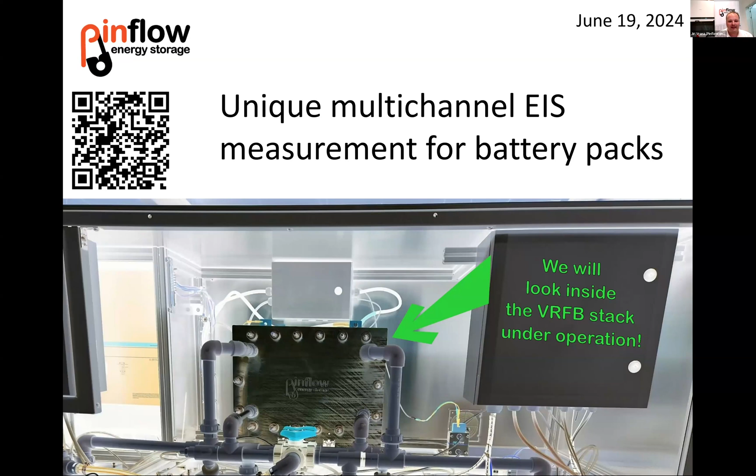So welcome everybody to Pinflow. We will be talking about redox flow batteries. Our company was founded as an academic spin-off from two Czech universities, where we were developing the systems completely from scratch. Redox flow batteries are focused on stationary energy storage. I will later describe the technology in detail. We started from very small systems. We went through all the stages of the laboratory scale-up process of stationary technologies. So we started at lab scale, then we were working with semi-industrial scale.

We come from the University of Chemistry and Technology in Prague, but the scale-up process was mainly conducted at the New Technologies Research Center under the University of West Bohemia, where we developed a 2 kilowatt redox flow battery stack, and later we spun off Pinflow, where we gained the license for the utilization of the academic know-how that we gained as researchers. Now we are in a nice manufacturing hall, and we are delivering our products for researchers from laboratory scale through semi-industrial scale up to industrial containerized demonstrator solutions of redox flow batteries.

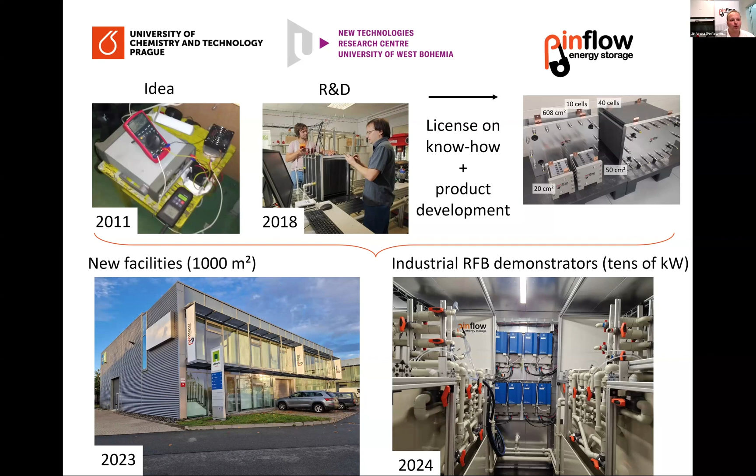But what is a redox flow battery? Well, actually, it is a flow electrochemical technology for energy storage. It is tailored for stationary application. We are pumping liquid electrolytes into the redox flow battery stack, where electrochemical reactions occur. We are always pumping positive and negative electrolyte, and inside the battery stack we have inert electrodes, and on their surfaces the electrochemical reactions occur. So we have positive half cells and negative half cells that have inert electrodes, typically carbon, and then we have some active species in the positive and negative electrolyte that are reacting on the surface.

The half cells are separated by an ion exchange membrane, and that is between the half cells and between bipolar plates that assure electrical contact between the positive and negative electrode. So the system geometry of the battery stack is actually very close to fuel cells, but the difference is that we are working with liquid reactants.

There are many flow battery technologies with different chemistries, but one of the most common is probably the vanadium redox flow battery. We will be working today with the vanadium redox flow battery, which comprises vanadium(III) and vanadium(II) in the negative electrolyte as electrochemically active species, and vanadium(IV) and vanadium(V) in the positive electrolyte. The solution is in an acidic environment in the presence of sulfuric acid.

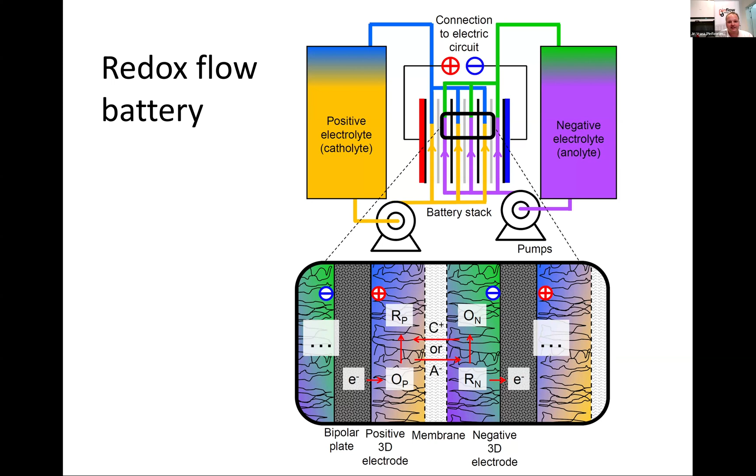But why deal with flow batteries? What is the business motivation? Where is the market for this technology? Well, this technology actually separates the power from the capacity. So it is a very modular energy storage solution where you can truly tailor the parameters of your stationary energy storage.

Typically, we are targeting solutions where we can utilize the high capacity load. The capacity is given by the volume of electrolytes, and flow batteries target longer duration energy storage. So from the perspective of market reality, we are somewhere between lithium stationary storage and fuel cells. Our batteries are designed for, let's say, 5 hours to 20 hours of operation.

The advantage of flow batteries is that the electrochemical reactions occur in liquid only on the surface of the electrodes, but all the active components are actually in a very nice environment given their chemical nature. It means that the lifetime of the battery is also amazing. The electrolytes in vanadium redox flow batteries do not degrade over time.

It means that when the battery lifetime is over, typically caused by mechanisms like erosion, like when a river is cutting into the earth, which is the mechanism damaging our electrodes over long-term decay, at the end of the system's lifetime you just pump out the vanadium electrolyte, and you can practically immediately, without any major treatment, use it in a new battery.

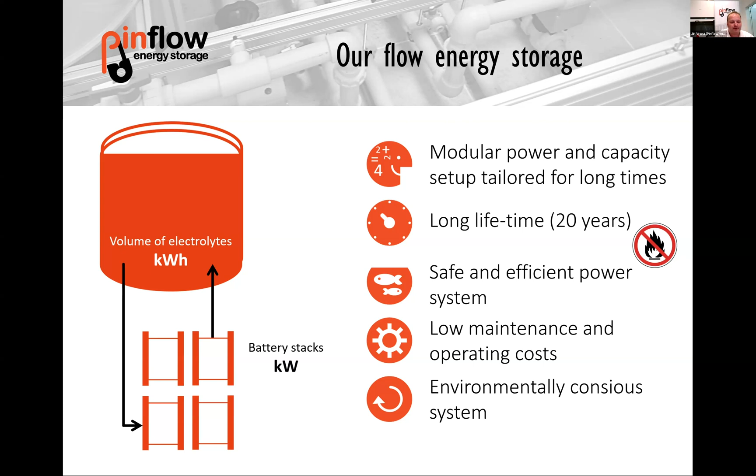In PinFlow, our story where we are hitting the market with redox flow batteries, we are actually utilizing all of our know-how, all the research experience we have gained, and turning that into products that can be used for research, development, applications, and also verification of flow batteries. And we are strongly preserving that approach where we are utilizing all scales.

We are delivering lab-sized systems for development of new chemistries, for benchmarking of membranes and bipolar plate materials, for development of electrodes, but also for quality control. For working at pilot scale in laboratory conditions, we have our portfolio of semi-industrial, let's say pallet-sized products, test benches, kilowatt rigs, where the redox flow battery stacks can be verified. And then we also have the product portfolio of demonstrators.

Well, everything always starts with laboratory research. All new electrolytes, all new materials are always verified in the laboratory. That is the best scale to work at, because when you solve the issues of your research, you can verify that in small systems. In these small systems, the active area of the electrode can be between 4 and 50 square centimeters. At this small scale, you typically don't have issues with electrolyte distribution inside the reactor, and you can very easily accommodate a lot of sensors into the system.

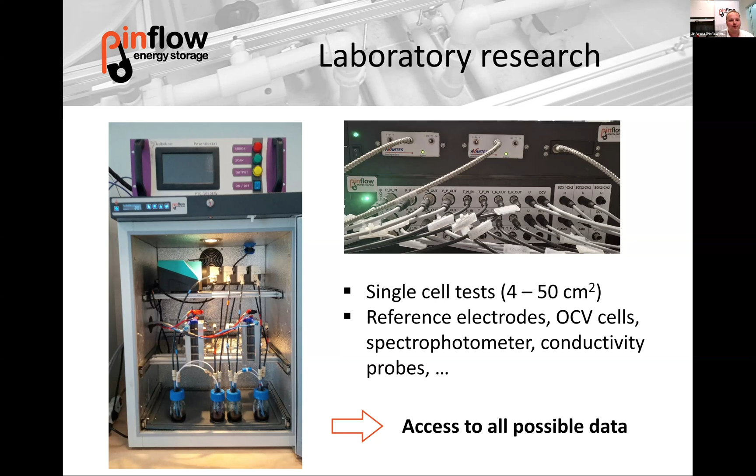You can measure how the state of charge of your electrolyte is changing through open circuit voltage cells. Typically the electrochemically active species show color changes, so you can use photometric techniques to observe the changes. You can also check how the conductivity of your electrolyte changes when there is some kind of pH change or consumption of H+ in the half reaction. So in general, you have access to all the data you can imagine. This is the advantage, as I see it, of laboratory research of flow batteries.

But when we then look at the real installation, the issues in the stack are starting. You have practically no information about what is going on inside. The battery typically has some battery management system, BMS, which is monitoring if everything is safe for operation, but typically it considers some industrial sensors, and you have truly no idea about the stack.

The issue is that the stack assembly is bipolar, so it means that you are using bipolar plates that are positive from one side, negative from the opposite side, and you do not have potential control on your electrodes. You just need to rely on electrochemistry, which can include the reaction kinetics on the electrode, and then also the mass transfer. It means mainly convection of electrolyte through your electrode zone. But truly you do not see anything.

You can see just the stack voltage, where the information is truly limited by the amount of cells inside the battery stack. So in order to understand what is going on inside a redox flow battery stack, you need to bring some kind of advanced interstep between the laboratory scale and a real operational redox flow battery.

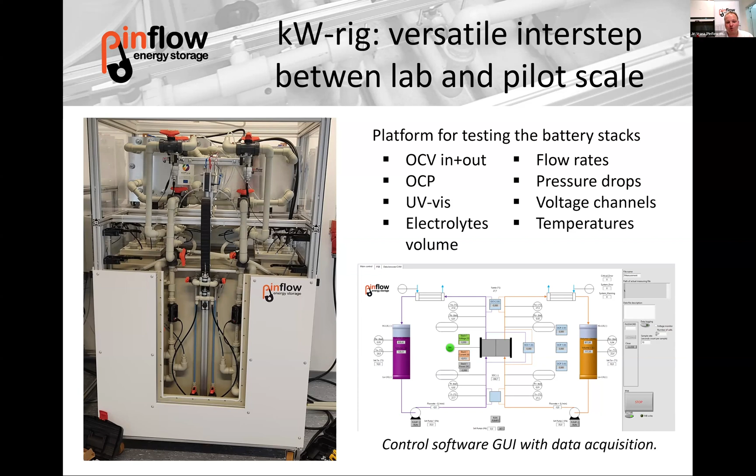We are precisely monitoring flow rates. We are also observing the pressure drops. We also have flow control on our pumps, so we can hydraulically characterize our stacks. So we truly see a lot of data from the system. But still the question is, what is going on inside the stack, inside the individual cells?

And this is something where we as PinFlow are a little bit unique inside the community. We are developing and manufacturing our redox flow battery stacks, our reactors, with electrical contact on each cell, on each bipolar plate. And we are doing this in our laboratory-sized products, but also in our pilot scale products. And through these electrical contacts, we can use a lot of techniques to look inside. The simplest technique is cell voltage monitoring.

Inside flow batteries, we are facing one, let's say, pretty weird phenomenon, especially for those of you who are dealing with fuel cells. As we are pumping highly ionically conductive, electrochemically active species inside that reactor, the current can, let's say, select whether it will proceed through the reaction and then through the ohmic pathway of the electrode, or whether it will bypass the internal cells through the electrolyte manifolds.

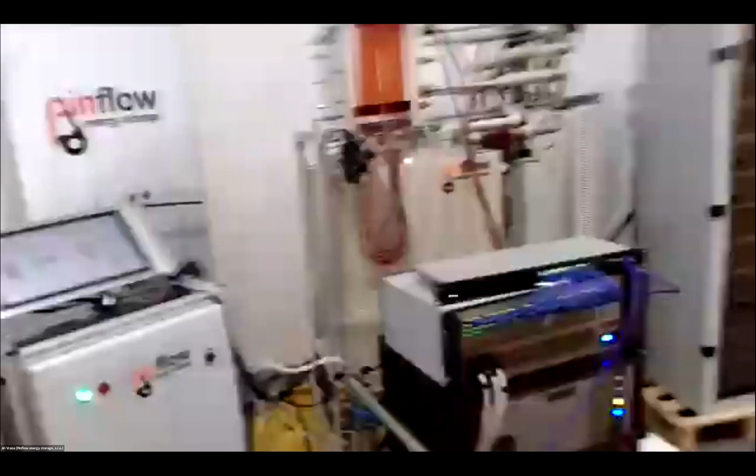Okay, so let's go from our lab to our semi-industrial laboratory. Okay, so wait for the stabilization of that screen. Very good. So everything is working now.

What you can see in the middle of the screen is our kilowatt scale test rig. The orange part of the system is actually our redox flow battery stack. The active area of individual electrodes is 608 square centimeters. We have 20 cells electrically in series, and the hydraulic distribution is parallel.

The electrolytes are brought from the yellow-gray tanks that are below the orange stack. We are using welded polypropylene tanks that are filled with 70 liters of electrolyte on each side. So it means 70 liters of positive, 70 liters of negative. It is roughly giving something like 2.5 kilowatt hours. The stack nominal power rating is something like 2 kilowatts, let's say.

You can see that on top there is a red and black wire that is going into the stack. That is the electrode connection. I will comment on that later. But before that, you can also see the hydraulic loop that is going into the stack. So I will go a little bit closer, where I will comment in detail.

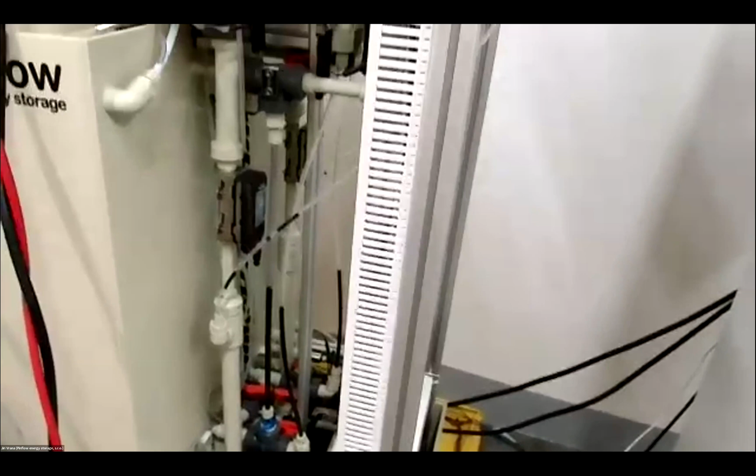So here we can see the stack from another perspective. You can see the tubing. And at the bottom of the unit, there are centrifugal pumps. They are below the tank. They are black or dark blue. And we are pumping electrolyte from the yellow-gray vessels through the flow meters and through this tubing inside the redox flow battery stack.

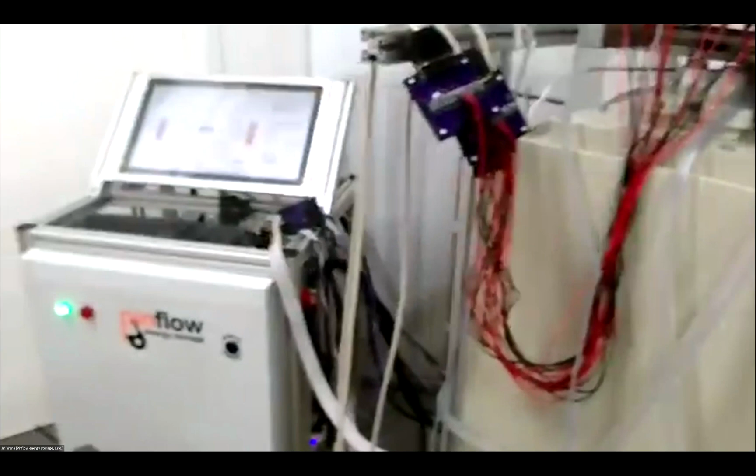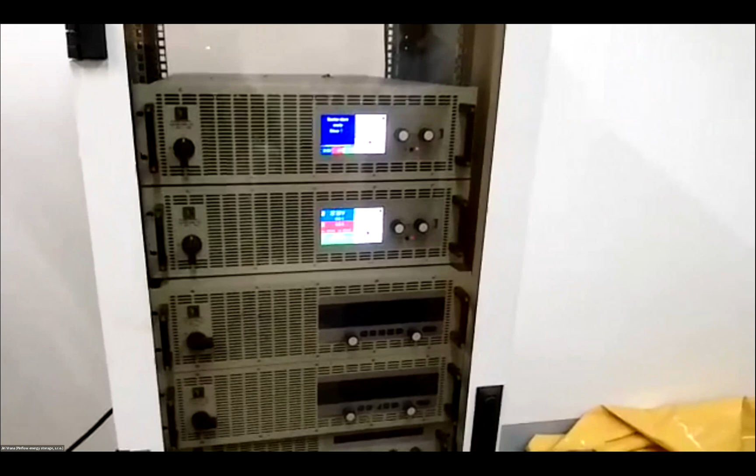We are using our own control unit with our control software for operation, for control of the system, and for data acquisition from all the sensors. And next to the unit, there is also power electronics. We are using a bidirectional power source, power load. And today, it goes through the EIS unit from Kolibrik that we have here.

So now let me comment a little bit more on the electrical connection. The stack on top is connected through the EIS unit to the bidirectional power source power load. The bidirectional power source power load provides the basic unit, especially for charging of the system. And then in the EIS unit, it is actually split. One part of that, the bottom part, is the stack load, so it means that the system comprises its own internal load.

I can show you a little bit more from the back, where you can see the red and black blue labeled cable that goes from the bidirectional power source, power load, and then on the other pins after EIS, on the orange copper terminals, they go to the stack. The internal load capacity can be something up to tens of kilowatts. So it means that also some cooling is necessary.

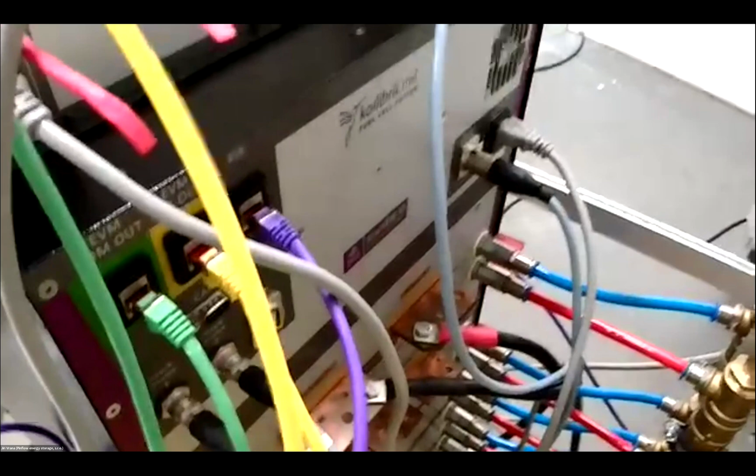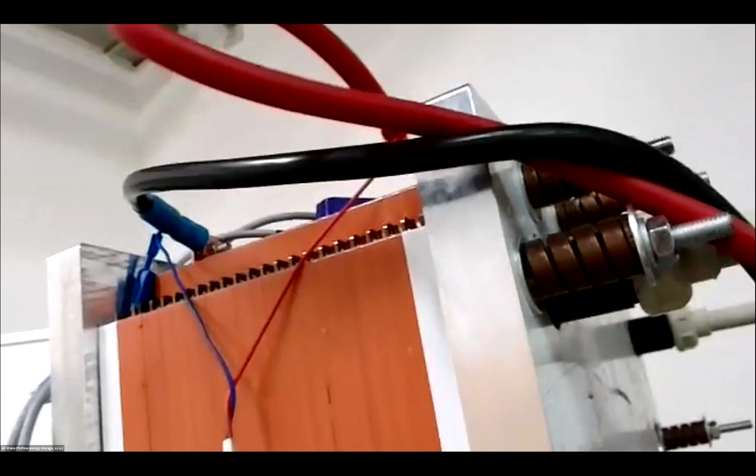You can see the hydraulic manifolds with the brass vertical line with blue and red tubing that are entering into the load, but the miracles are actually happening on top in the stack EIS. That is the place where the modulation of the constant current signal is happening. And this modulated signal we are bringing to the stack terminals on top of the system. So we have now AC that we can control and bring to the system or take from the system.

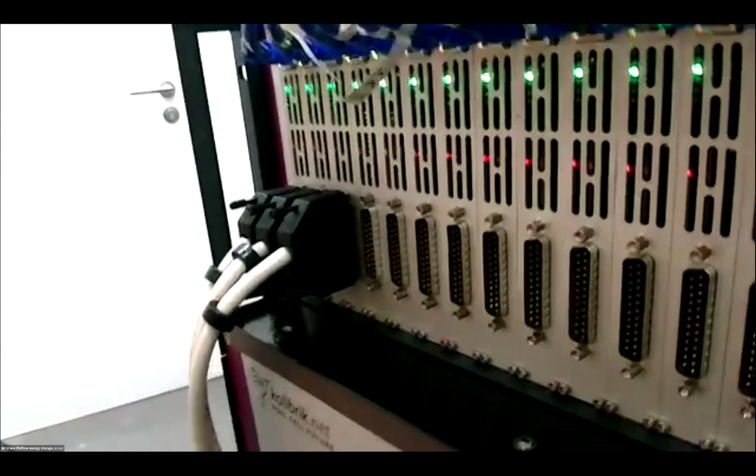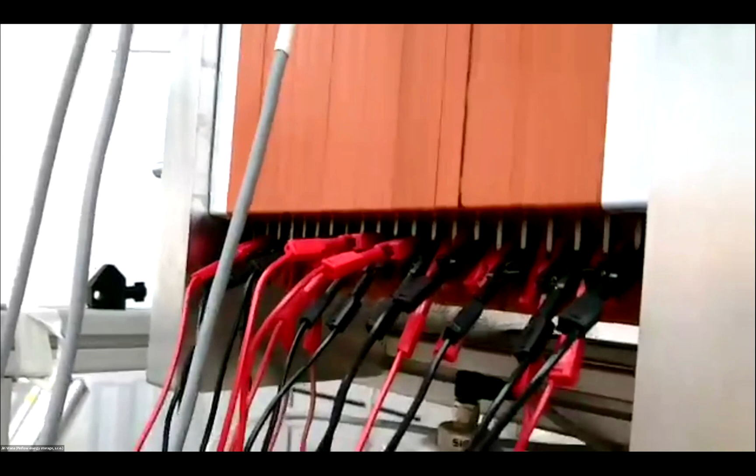And then we have also sensing units. And you can see that it is a pretty abundant system. We are only using 3 channels. Each channel here is tailored for sensing of 8 cells. And through these probes, we are bringing the red and black sense wires to the electrical connections inside the redox flow battery stack. On top, there are also other probes, the blue boxes, from which we are sensing the stack voltages.

Okay, so that is in general the system. It will be a little bit loud. I will leave my colleague to turn the unit on, and we will move into another room where we will be controlling the unit on a remote basis. So let me get back to my computer, and I will share my screen shortly again.

Okay, and here we are now inside the computer, inside our control unit that is driving the system. And I will hand over to Jiří Charvát, who's operating the unit today. So right now we will start with some real-time demonstration of the unit itself. But first we need to be sure that the unit is prepared for it.

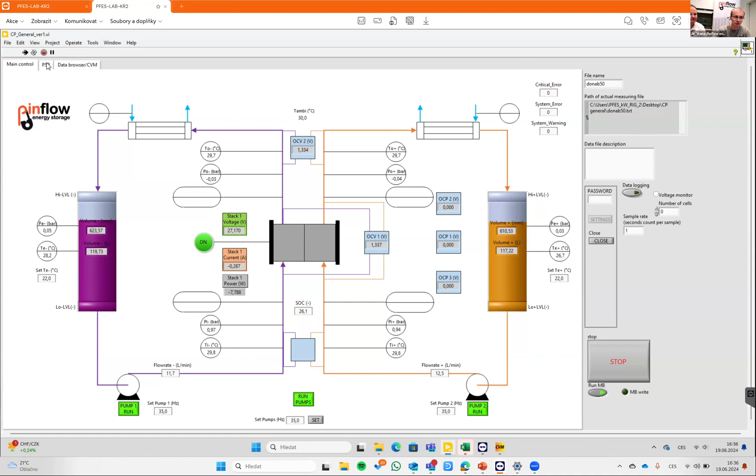So now we will go to the second part of the program, where we might change actually the bidirectional power source units, as was described by my colleague Jiří.

We want to do measurement right now, and as you know probably from lab measurements, the absolute majority of the EIS measurement is done during OCV. In lab, it's quite easy because with the potentiostat you can do it very easily, but in this larger scale, it's not that straightforward. So you actually need an external power source to give some positive, for example, charging current, and then you use the load inside of the Kolibrik Mega EIS, and afterwards you are able to work around OCV.

So right now I will start charging the battery stack with 50 amps, and here in this graph on the right you can see that we are charging with 50 amps. You can see the response from the voltage of the battery stack, and you can see that right now we are charging the battery stack with approximately 1.5 kilowatt.

Now I will switch to the second window for the Kolibrik instrument, and here you can see right now that we are charging the battery stack with this 50 amps. But as I mentioned before, we would like to do the measurement around OCV. So we will set the same discharging current by the external load. So now I will set the same current with external load. And now you can see that actually the battery stack is around OCV. So it means practically zero amperes inside the system.

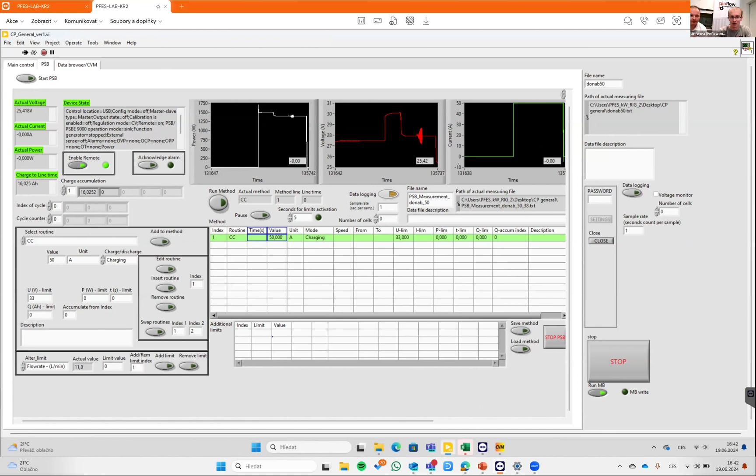Now I will just show that we can also do the measurement not just around OCV, but for example during the discharging of the battery stack. So now I will switch to the second window. Now I will turn off the charging current. So the current is 0, power is 0, and when I go back again, you can see that right now we are discharging the battery stack with 50 amps. All other settings will remain the same. So again, the amplitude would be 20 amps, but we will measure this under the current load of 50 amps.

Before we turn that on, in this right window, you can actually see the voltages of individual cells. So what I truly like on this software is that you have a very great overview about your stack. You always see what is going on, and this transparency is something what we truly need to have as researchers, and Kolibrik is very open in the way how they are presenting the data from their software. So now we will start the measurement. So I will press frequency scan.

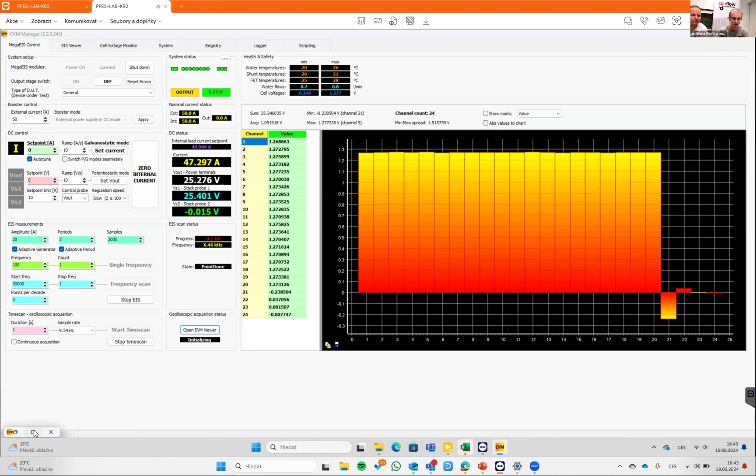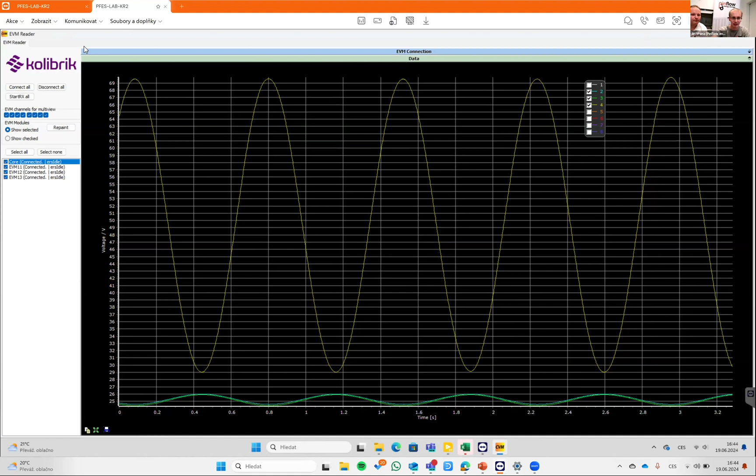Now I will present you some older results which I measured before this session. So I will load some older data. Okay. Yeah, the data are relatively big, so we need to wait a few seconds. Okay. And yeah, great. And here you can see the whole spectra, including the mass transfer.

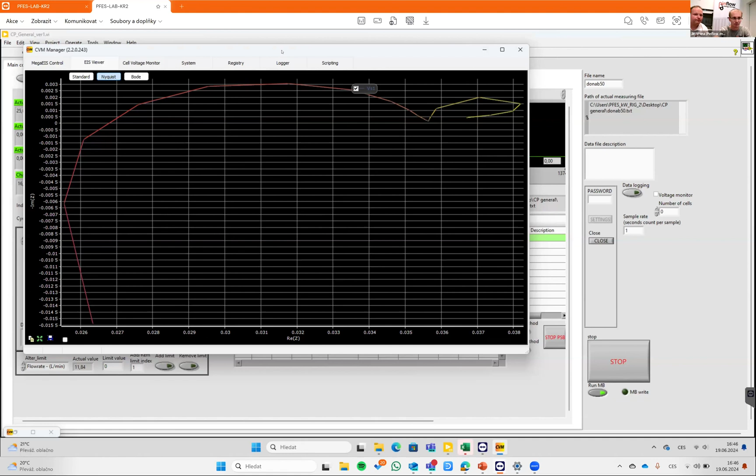So here from the spectra, you can see this intercept. From this intercept, you can estimate the ohmic resistance, the diameter of that semicircle gives you the charge transfer resistance, and the diameter of the next semicircle gives you information about the mass transfer resistance. Okay, and here you can see results from individual cells. This was measured with a relatively high flow rate, so there is very, very low mass transfer limitation.

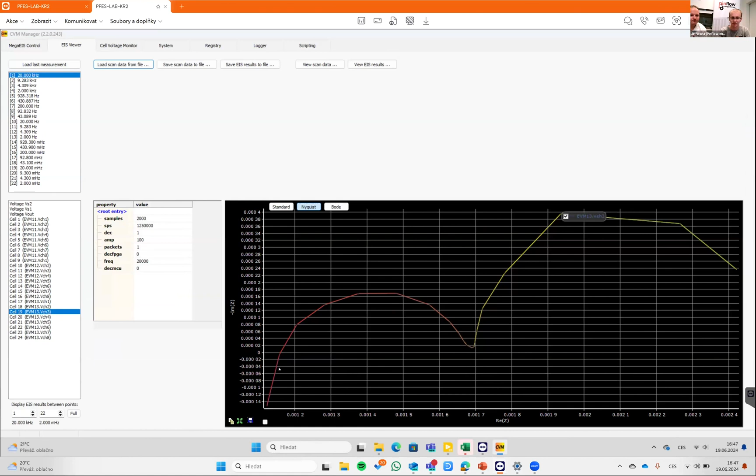Now I will load some other data which were measured with a much lower flow rate. And again, I will mark all the individual cells. And now if you observe this intercept, again, the ohmic resistance is the same as during the previous measurement. The charge transfer is again the same, but the last semicircle is much, much bigger and gives you information that this measurement was done with a lower flow rate.

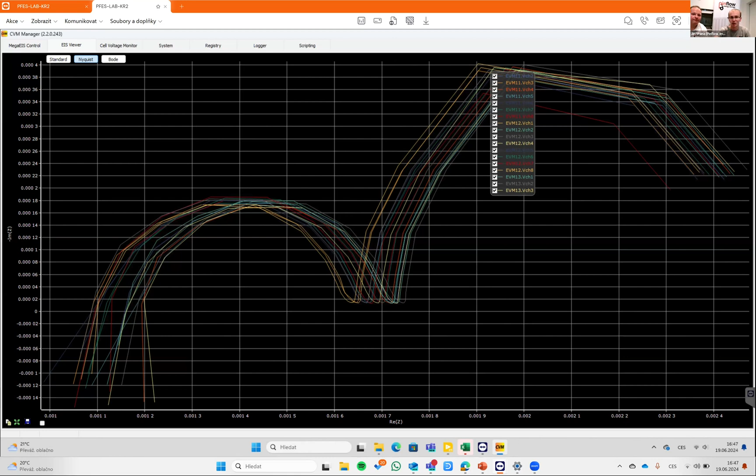What is also very nice here is that you can see a certain distribution in ohmic resistances, as we are working with carbon felts. There is a certain level of inhomogeneity. So from the distribution of those resistances, you can see that the input material also shows a certain quality. So you can also double check how good your stack design is or how good the supplier of your active materials is.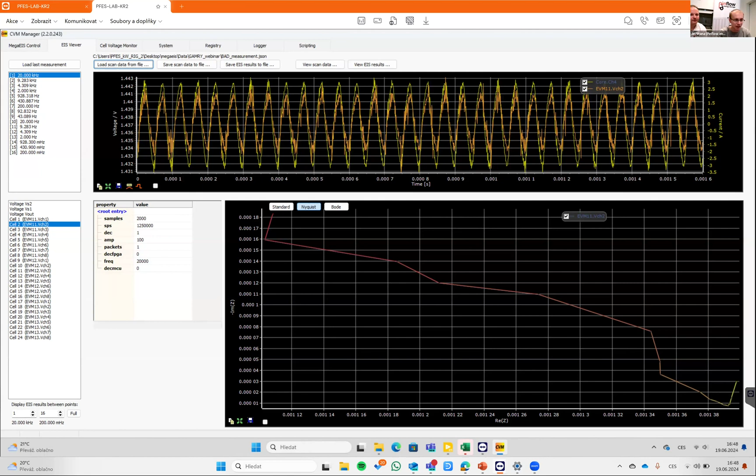And the last thing which I would like to show you is that even though you have a great battery and a great mega EIS, you need to be very, very careful about how you connect it together, because these measurements were measured with the same battery stack, with the same unit. The only difference is the connection. The problem was that a relatively high current is flowing through your power cables, and this might cause some inductance around them. If these cables are too close to your sensing cables, it will affect your measurement and you are not able to see absolutely anything.

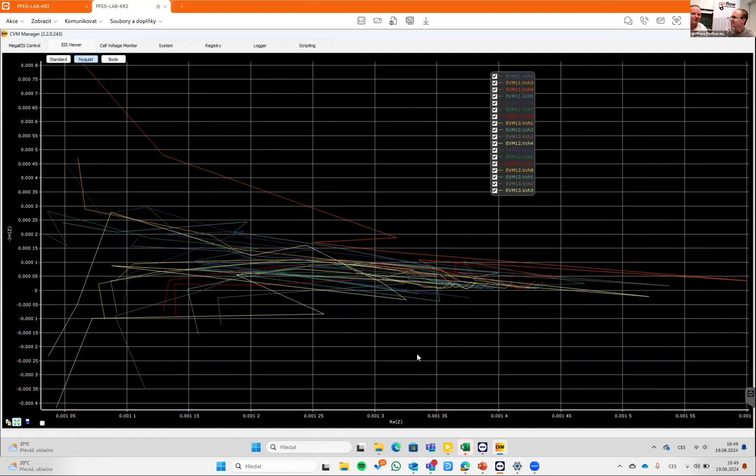So it should be like a last warning. Even though you have this great system, you should be very, very aware of how you connect everything together and what your final connection is, and you still need to think about it. Yeah, it is exactly like that. You can work with excellent devices, but the way you connect them can always influence the system.

Of course, the Nyquist plot is the most important thing for us typically, but I also know that in other fields, somebody might like the Bode representation or the standard representation. So all those features of the software are included. It was just a very short introduction of the things that we feel are relevant for flow batteries.

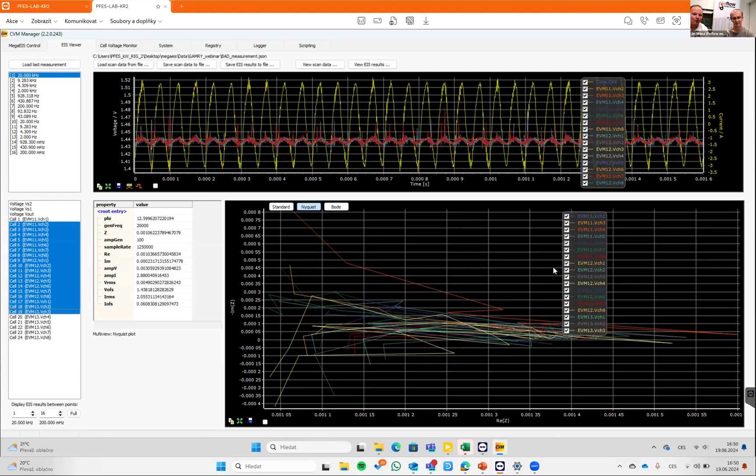I also hope that it was inspiring and that you have enjoyed the look at perhaps a new technology, because we know that flow batteries are not in the main scope for energy storage. So it is a slightly new topic, although they were developed already in the 60s. Actually, vanadium flow batteries are celebrating their 40 years anniversary. They were invented in Australia, so this year we are celebrating, and of course we are developing.

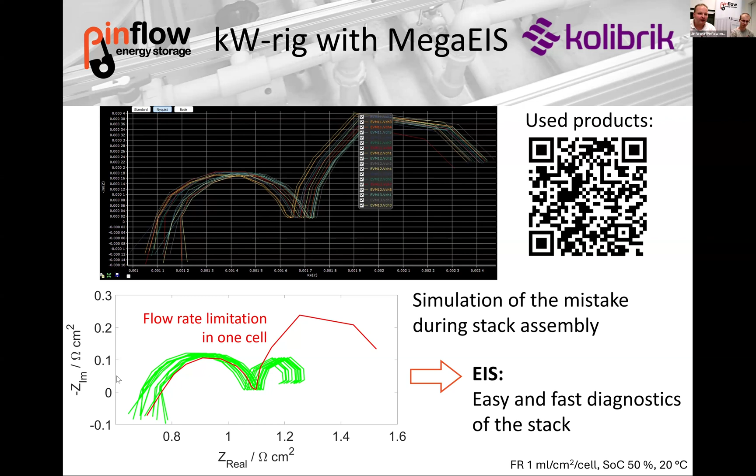From the perspective of the manufacturers, we know that this might be an issue that doesn't allow you to detect the problem after 1 week of operation. You will typically see this problem after several months of operation. So you must be very careful about it. And in order to preserve good quality of our products, we are even conducting research like this to deliver the best value to our customers.

I had a couple other questions pop up as well. Schrader was asking if you had any further explanation about how the bidirectional power source or load work together with the Mega EIS system. Okay, I will try to answer the question.

Normally, if you are working in a lab, you get a potentiostat, and you can do the modulation of your voltage even around zero. But here you got just a load, and you cannot do modulation right around zero. So you actually need this bidirectional power source, which gives you some, let's say, charging current. Then you use the same discharging current with this power load, and you can do the modulation with this discharging current. So here, this discharging current was 50 amps, and we did 20 amp modulations up and down.

So we did this modulation, and this is the reason why you actually need this external power source. It means we were not working with a potentiostat today. It is stack electrochemical impedance spectroscopy measurement. The principle is a little bit different, and that is the reason why we need to have also the power source for the system.